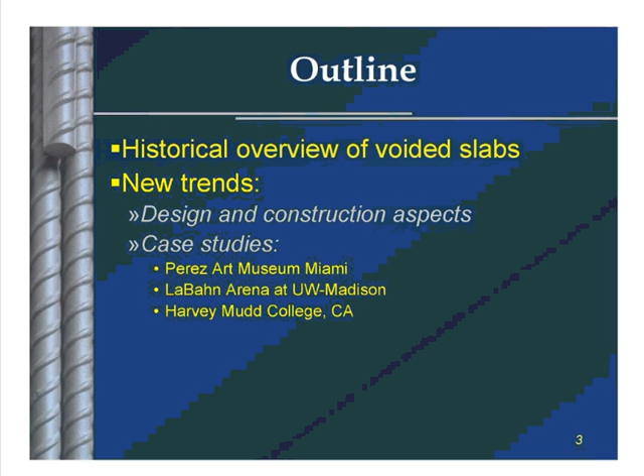The outline for today will start by giving a brief historical overview of voided slabs. I think this is important to put the topic in context. Then we'll talk about the new trends. After all, there's a new mousetrap out there, and that's why we're here having this webinar. So what is it, and more importantly, why is it important to you? We'll talk about design and construction aspects and case studies of 3 projects that are pretty much completed as we speak: the Perez Art Museum in Miami, LaBahn Arena at the University of Wisconsin-Madison, and Harvey Mudd College in California.

The motivation for the seminar is: what are voided slabs, and why use voided slabs? I want to underline constructability aspects because for this seminar I really want to discuss how the system is built. From an engineering standpoint, the system is fairly simple, but it's the constructability I want to make sure comes across as not very difficult to do. More importantly, why should it matter to you? After all, as a concrete contractor, you want to be able to self-perform, and this system, in my opinion, lends itself to that.

On the screen are a couple of pictures of voided slabs, for example a waffle slab or a wide module one-way joist. These systems have been around for a long time, and the goal is very simple: remove the dead load, that extra mass from the slab where it's not needed to carry the load, so we can span further. That's the challenge with cast-in-place concrete, especially when it comes to promoting concrete in the office market arena, where more often than not the knee-jerk reaction from architects and structural engineers is that structural steel is the system that should be used for office buildings. Here we have a system, a wide module waffle slab, where we can span 40, 45 feet. We're going to talk about new trends today that are another tool in the toolbox that can be used to promote concrete in the office market arena.

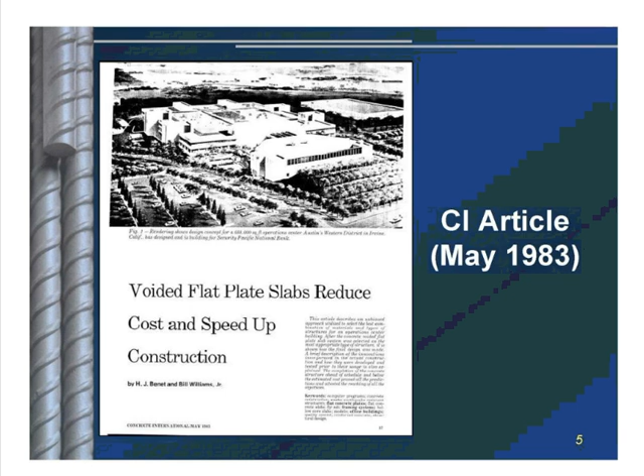From a historical perspective, voided flat slabs, as I found in the literature preparing for this presentation, were discussed in an article published in Concrete International in May 1983 by Bennett and Williams. It discussed the use of these voided flat plate slabs for a project in Irvine. Briefly, it was a low-rise project, about 4 stories, 688,000 square feet, with large unobstructed spans and heavy live loads. The system they looked at was a one-way voided slab, with voids created by sonotube voids, as you see on the screen. Again, the goal is simple: remove concrete where it's not needed to carry the load, so we're able to span further. This is a recurring topic you'll hear me talk about today.

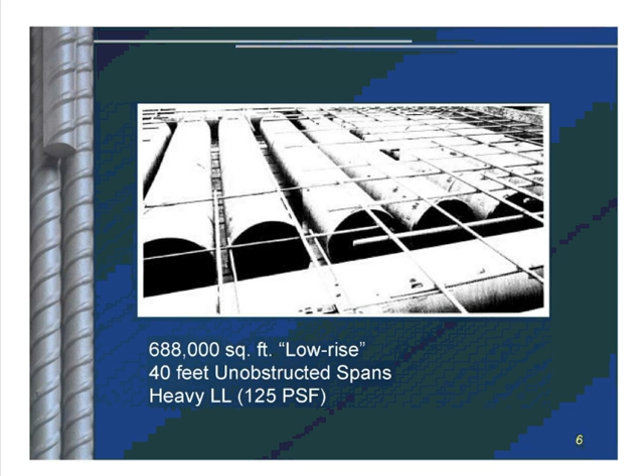They also did a study where they compared the voided flat plate system versus a precast double T as well as structural steel. What you have on the screen, the vertical axis is the cost increment in dollars per square foot, and across the bottom is the area in square feet. So you have times 100, or bay size. For example, a 50 by 50 bay size, that's 2,500 square feet.

As you look at the trend of costs across the bay sizes, you'll see that the voided flat plate is very economical as you almost reach a 2,500 square foot bay size, or 50 by 50. The double T eventually becomes a little less expensive, but for this project the spans were in the 40-foot range, so they decided to go with it. Structural steel was not even close.

And this was out on the West Coast. Obviously, in high seismic risk zones, removing mass is a benefit because it lowers the earthquake force demand on the structure. So, as you can see, this is a system that's very appealing. It was back then, and it remains now, even in high seismic risk zones.

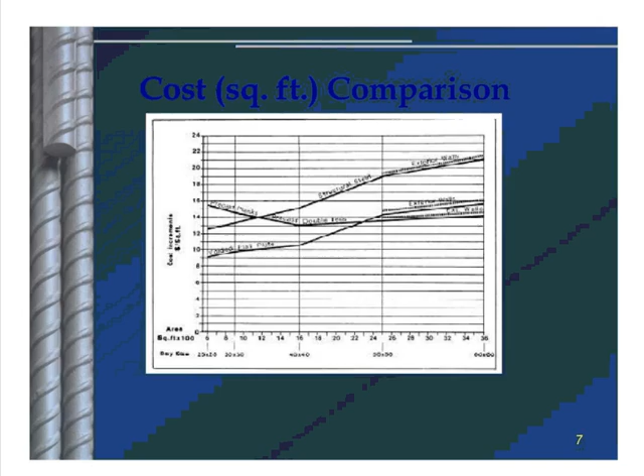Okay, so when the concrete is placed, the void is displaced, which creates buoyancy. Now, there's not enough mass in the reinforcement, the top mat of reinforcement, to hold the voids down. So there's two ways of doing this. We're going to see one way now that I have on the screen, and that's more of a positive way of anchoring the voids using the straps.

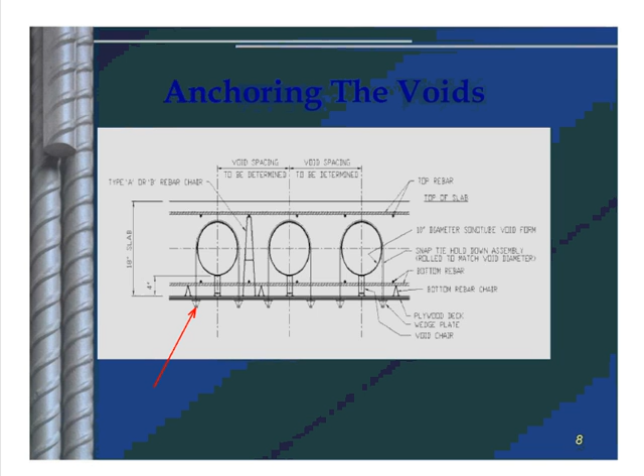Let's see if I can use an arrow here to point to the straps. Okay, so you see here the clips that hold the straps under the formwork. This way, when the concrete is placed, the voids are not displaced. That's one way. There was another way that I'll discuss in a little bit. But this is obviously key in the constructability of the system, because otherwise the system becomes buoyant.

Other traditional systems, I mentioned waffle, wide modules, hollow core - that's another form of a voided slab. Foam voided systems, filigree - many of you may be familiar with this. It's very common in the New Jersey area, and also in the Midwest in some areas.

Essentially, for those of you who are not familiar, filigree is obviously a trade name, so I'll do my best to avoid talking about specific names and try to be general. In this case, this is a composite where you have a precast panel that you'll see here on the bottom. The precast panel is placed on the formwork and acts as a stay-in-place form, directly placed on shoring. Then you have the voids, in this case the styrofoam voids. They're placed, again, with the objective to reduce dead load. And there's reinforcement that goes over it, and the cast-in-place topping.

The system works as a unit when it's done. As you'll see, the surface is left rough to create some composite action, some aggregate interlock. In addition, there are some reinforcement trusses, wire trusses that stick out of the precast that you really can't see from that picture. But the whole system, in any event, works as a composite unit.

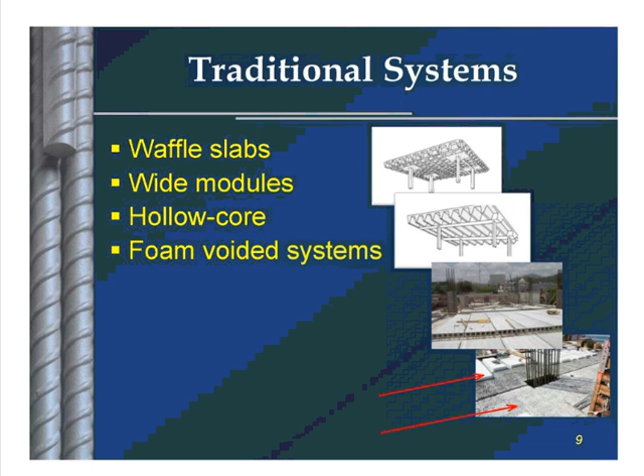So those are the traditional systems that have been around for the better part of 50 years. And even before that, there were other systems that used clay tile. But for the sake of time, I'm just going to leave it at that.

So what is the new trend? The new trend with voided slabs - the goal is to use a flat plate analogy or flat plate application, a system that requires very simple formwork, very economical for short spans in residential type buildings. The goal here is to use that same system with the simplicity of the flat plate formwork and be able to use it for longer spans, as you have in office buildings, 35 to 40-foot spans. And by reducing the mass here, we're able to span further and be competitive in that office market arena.

So what you're looking at on the screen is the shoring here that is supporting the reinforcement, and is also supporting these wire modules, these cages - kind of hard to see, but they're in red - that house the voids. The voids are these blue balls, if you will, on the screen. They have to be placed inside these position cages to hold them in place.

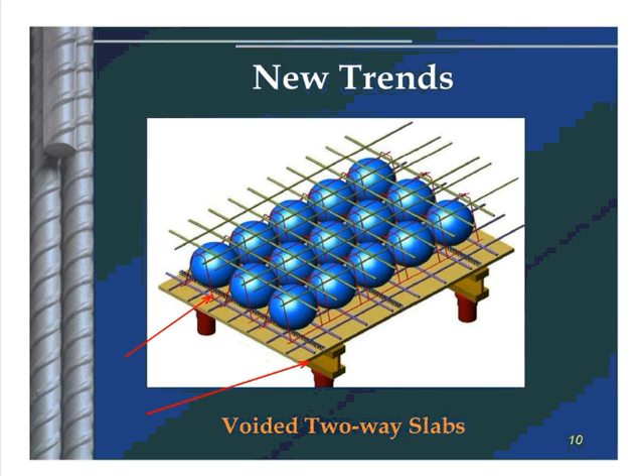So the goal here is, how do you build this? Obviously, we have the same issue with buoyancy. By placing the concrete, we're displacing the void, so we need to be able to hold them down somehow. There's two ways. The one I mentioned before is more of a positive way of anchoring the system, but it's time consuming. If you have a two-way slab, you've got a lot of these voids, and it's tedious and labor intensive to anchor all these systems in place. So what they've come up with—and this system has been used in Europe for the past 15 years—is to place the concrete in two stages.

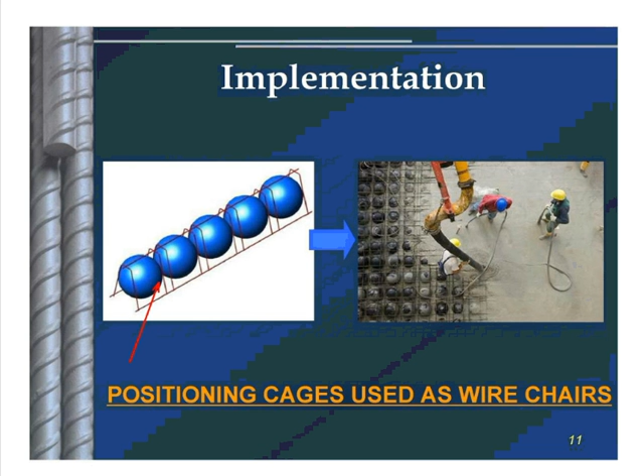The first placement covers about 3 inches, about a third of the slab. We let that set so it's able to hold the cages in place. From that standpoint, it's very similar to the filigree system, where in this case it's cast in place because all the concrete is cast on site, but there were two concrete placements. After 3-4 hours, once the concrete is hardened enough to hold the voids in place, the second concrete placement can take place. After that, the finishes are the same—vibration of the concrete and the finishes—as you would have with a conventional flat plate.

The modules come in two sizes. The low profile modules, 4 to 7 inches thick, are typically used for short spans. But what's really exciting about the system are the standard modules, the 9 to 18 inch deep modules applicable to long spans. This is really the game changer here, folks, where we can compete against structural steel in the office market arena.

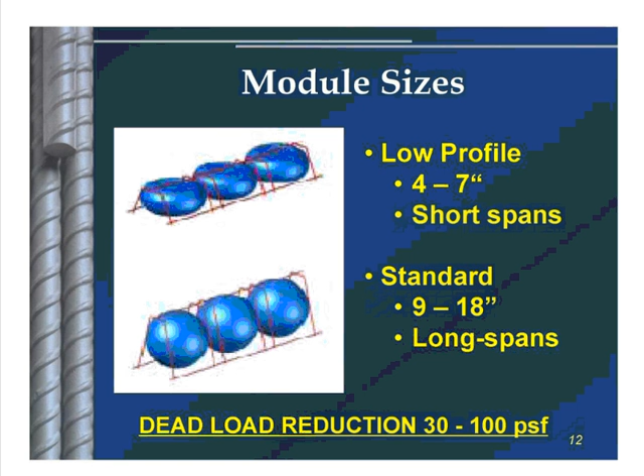We can reduce as much as 30 to 100 pounds per square foot of dead load, a significant reduction that obviously helps in the design. One inch of normal weight concrete is 12.5 pounds per square foot. As we start reducing the slab, the equivalent thickness changes. We still have the overall thickness of the slab—it could even be deeper than a conventional flat plate—but the equivalent thickness is less for a longer span. That's important to keep in mind.

In cross section, I'll try to show the staging of the concrete. At the top, we have the overall cross section before the concrete is placed, with the formwork at the bottom and the voids, as I showed before, on top. The first concrete staging covers about a third of the slab, enough to anchor it and hold it in place. Then the rest of the concrete is finished, and the slab is finished in a conventional manner.

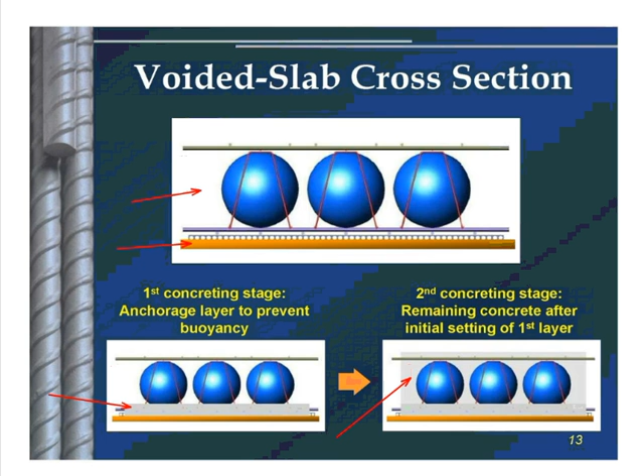So what are some of the benefits? Why are we doing this? Obviously, the goal here is to have large spans without beams. That's the key. Beams are expensive to shore, and in some states where labor is fairly inexpensive, it may be a competitive system, but in the Northeast, Chicago, and out west, labor can be expensive, so eliminating beams is a very cost-effective solution.

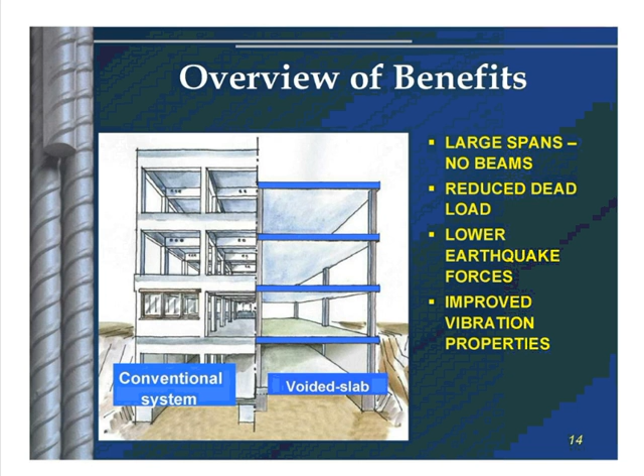Reducing dead load lowers the earthquake force demand on the structure, and this also has an important property relevant when we talk about healthcare facilities, hospitals, where vibrations are a consideration—in addition to other rhythmic type facilities, health gymnasiums, and things like that. Hospitals and healthcare facilities have structures very sensitive to high frequency vibrations. Without getting into the weeds, I can tell you this system is very stiff and very able to dampen vibrations. Some projects now have leveraged the system's ability to be very good with vibrations, so this is yet another important property of this system.

If we compare a voided flat plate, as you see on the top half of the screen, to a traditional structural steel system on the bottom, you'll see that the numbers are hard to see perhaps, but on the cast-in-place concrete, we have a 12-foot floor-to-floor dimension.

The same thing with steel, but the ceiling height in the concrete building is much higher than in the structural steel building. That's because we're able to have a smaller cross-section than with structural steel. With structural steel, for a 40-foot span, you need at least a W27. You throw in 7.5-inch concrete on metal deck, or even more, plus fireproofing, and all of a sudden you have a 3-foot overall structural depth, in addition to whatever plenum space you need for utilities.

This is, again, economical overall in terms of floor-to-floor heights. That has other implications. It allows you to have additional floors given enough building height, or it can reduce the overall height of the structure, with associated savings in reduced cladding costs, lower elevator costs, possibly even lower foundation costs. So all kinds of benefits.

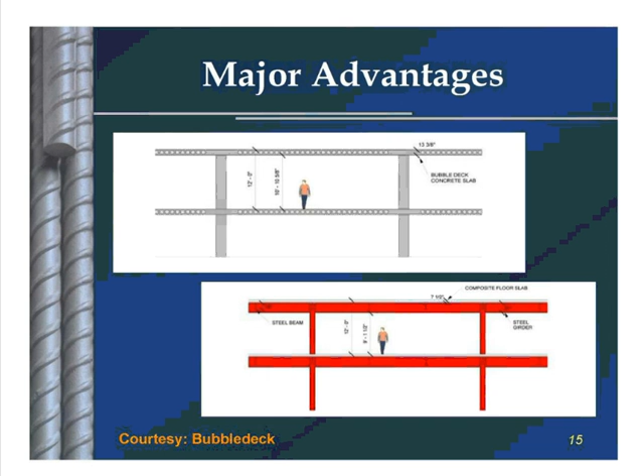Associated with this, the system comes with two options: a cast-in-place, as I've been talking about, but there's also a precast, as you see on the right side of the screen, very similar to the filigree, where the panel comes in from a precast plant with the voids already in place. So all the contractor has to do is set them in place on the shoring and cast the concrete. There is some additional reinforcement that needs to be placed over the joints, but that's the precast option.

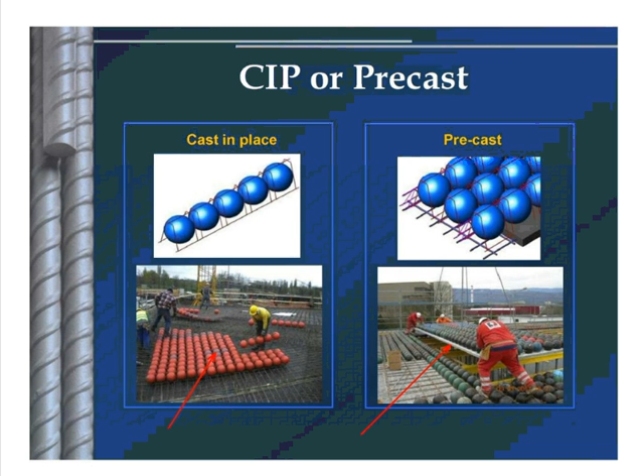As you'll see on the left, the cast-in-place, the voids are placed directly on the reinforcement, and here you'll see the worker placing the voids. You'll also notice that the voids come in different colors, as I'm going to point out. This is because the voids are made of recycled plastic, so nothing is wasted here. From a sustainability standpoint, that has obvious benefits in that we're reusing plastic to make these voids.

Site adaptability is another feature that, even compared to conventional concrete, is a benefit. With this system, you can remove the voids to run fixtures, slab fixtures, as I'm going to show, or run post-tensioning, bonded or unbonded, as I'm showing on the right-hand side. So a lot of adaptability on site to accommodate site conditions and the ability to use the system with post-tensioning. I cannot underscore that benefit enough, both as a bonded and unbonded system. Couple that with reducing dead load, and this really becomes a very effective structural system.

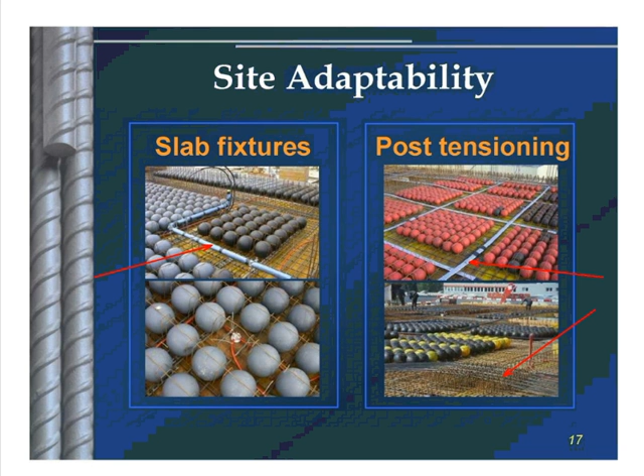Okay, so some of the design principles—I'm not going to spend a lot of time on the engineering. I have a lot of pictures of the 3 projects that I'm going to focus on, but very quickly, so you get a feel for some of the design issues. The voids act like a solid flat plate, but because you have voids, we need to make some modifications. The modifications come in 3 ways.

The dead load—it's very clear we're reducing mass from the system, so we're reducing the dead load. The stiffness—again, because we're creating a void, we're reducing the moment of inertia, so we're reducing the stiffness a little bit. The important one here is the shear reduction. The shear has to be reduced by as much as 50 to 55% where the voids are.

Here's where I need to make it very clear: much like a waffle slab, where the slab is solid around the column and you have the voids out in the middle of the bay—you have the same system here. Around the column, the flat plate, if you will, is solid, because you need enough punching shear capacity around the column. Wherever the capacity of the reduced, voided section exceeds the shear demand—wherever you have more capacity in the concrete with the voids versus the shear demand—then you can put in the voids. If you have questions about this, I'm available at the end of the presentation to go over it in more detail.

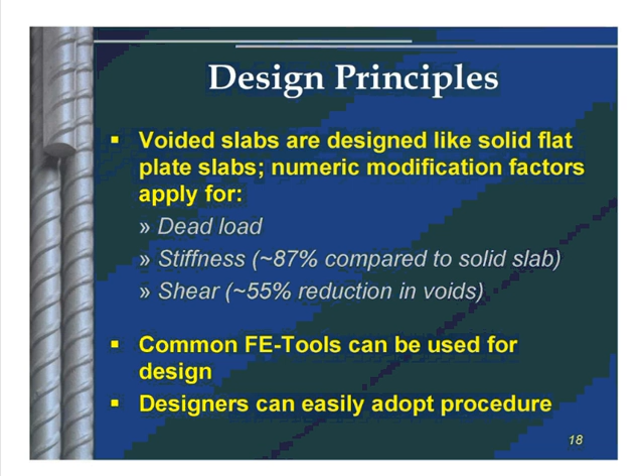You can use common design tools—analysis, finite element analysis, back of the envelope, all kinds of ways to do this—no different than designing a flat plate system, other than making these small modifications.

I mentioned some of the cost savings that make the system really competitive, but here is a full list of additional savings. Obviously, reducing the lateral force requirements, especially in high seismic risk zones, can have benefits. Also, reducing the mass can have cost implications in walls, columns, and foundations—all kinds of advantages. On the right-hand side, construction time gain.

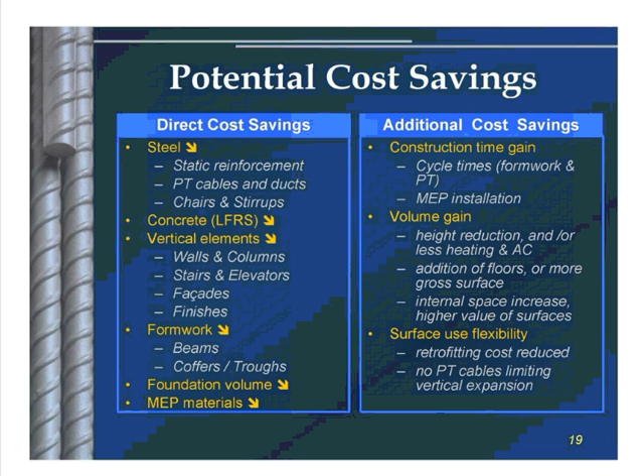You're self-performing, even though there is another system here that may be perceived as using these cages. In the projects I've been involved with, the cages are available to the contractor, and the contractor installs them, so there's no issue from that standpoint. I also mentioned other advantages, like reducing overall building height and the associated energy savings with that, as well as retrofitting advantages.

So let me jump in for the next 35 minutes or so and talk about the 3 projects that are under construction right now. Let me start with the very first cast-in-place option of this system, the voided slab. There have been others that use the precast option, but let's start with this one.

This is the Perez Art Museum in Miami, right on Biscayne Bay. It's being completed as we talk. At least the concrete is topped off, and they're moving on to the finishes and other things. Here's an aerial view of the structure. It's a low-rise structure, about 4 stories, but it's a complicated building.

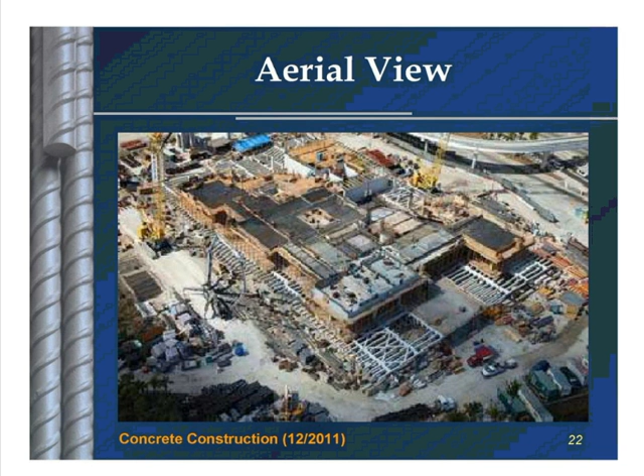From what I understand from the design team, structural engineer, the architect, numerous schemes were looked at and considered, 30 to 40 different types, including structural steel. They eventually settled on the voided flat plate option, which gave them the ability to design the large galleries, as I'll show you in a little bit. Obviously, this being a museum, large galleries were an issue.

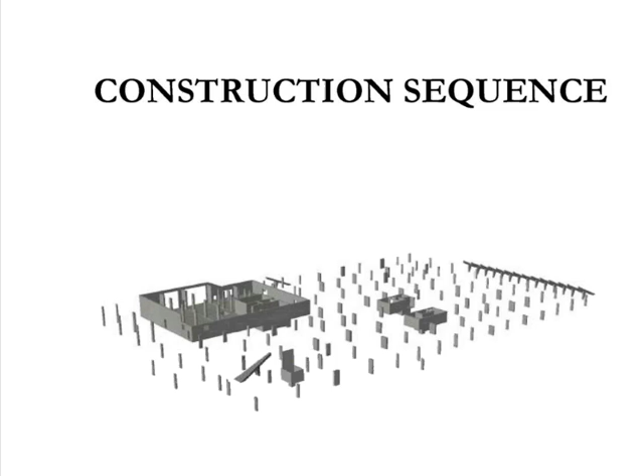So what I'm going to show you for the next few slides is a construction sequence to try to illustrate how the building was constructed and why some of the portions of the structure were designed the way they were, because I think it'll make sense once it's done. So starting at the base of the building with the columns for the first floor, adding the first floor system on top of that.

Now you start seeing something that is becoming apparent, which are these boxes. I'm going to point out to one. So these boxes here house galleries. And the goal here is to build a box that acts as one system with the floor.

So you need to be able to tie the floor with upturned beams, tie them into the walls, and put another box on top. By doing this, you're able to create a very stiff system that really works as a unit when it's built. So this box concept allowed them to have these large openings, as we'll see in a little bit.

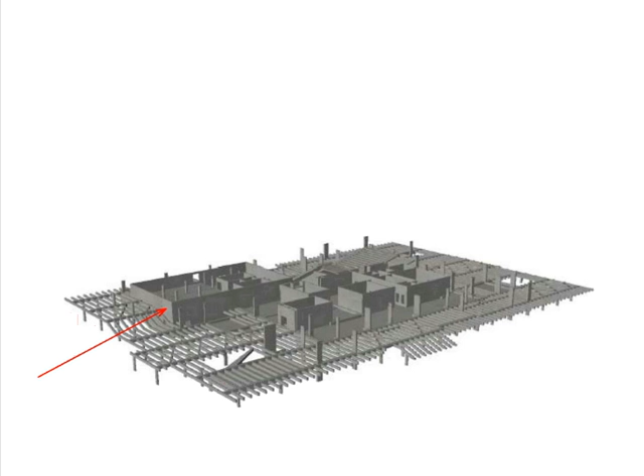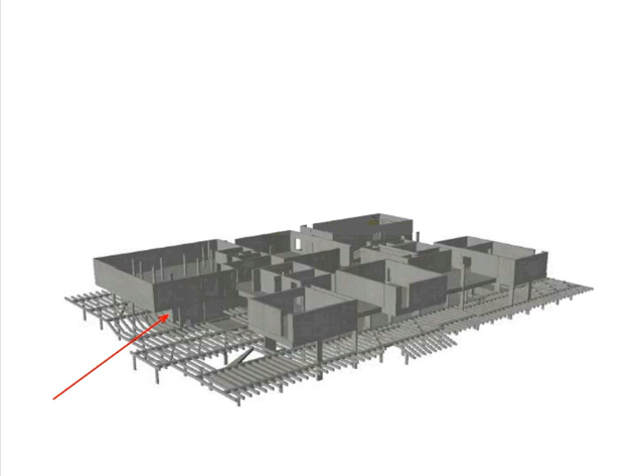Continuing with the erection sequence here, the second level, more boxes on top of that. And you will see, I'm going to try to point out here, very large cantilevers here, and you're able to do this by having one box built on top of the box below. By doing this, you're able to remove some of the exterior supports and have these unobstructed views and these large cantilevers. So you'll see the boxes throughout the structure.

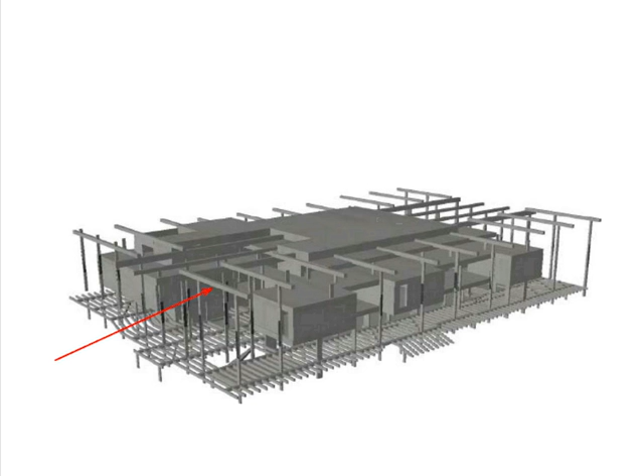The third floor slab and more boxes on top of that. Then we're kind of winding up to the very top where they had these precast beams just for architectural features of the structure. So that's the overall construction sequence very quickly.

And this was the challenge, that's why they went over a lot of systems, to be able to create this illusion of these large spans, some of them as much as 90 feet. By reducing the mass, you were able to put a relatively shallow beam that was able to be placed inside the false floor with a raised floor above.

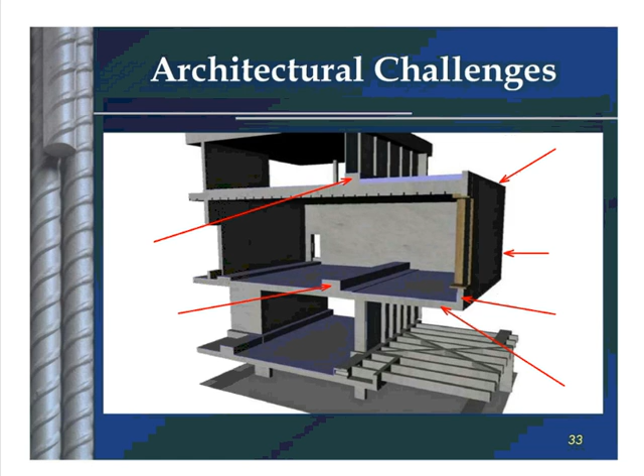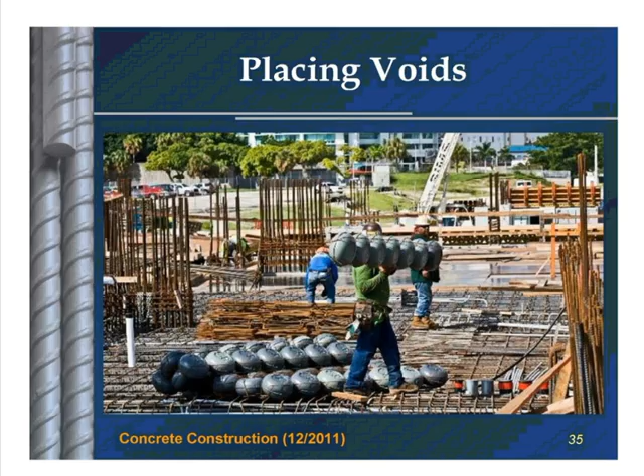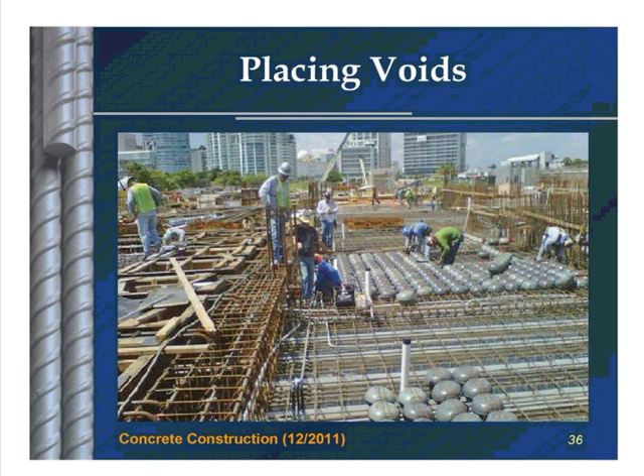Here's a view of the voids being set in place. It's important to make sure they were separated to be able to place the concrete. So I think I have a better picture next that shows this. They used a very sophisticated system to make sure the positioning cages were positioned at equal distance—this piece of wood here with a couple of grooves. But it works, and as you can see, they were able to place these voids in a consistent manner, and that did the trick.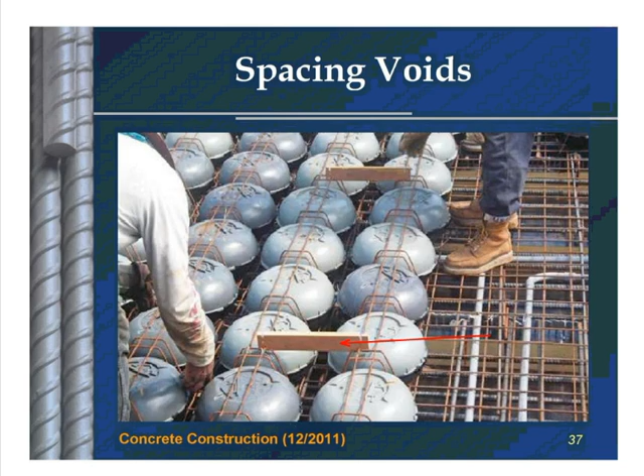And they use different types of voids. You'll see here these are larger spherical voids, and some of these reached, I don't know, 21 to 24 inches in diameter. Depending on the application, they use the squat voids, as I showed before, the normal size, and they pretty much use the full gamut that's available.

Here's a picture of at least one stage of the concrete placement. This one is ready to place the second layer to top off the slab. Similar picture here with the concrete done in the first third.

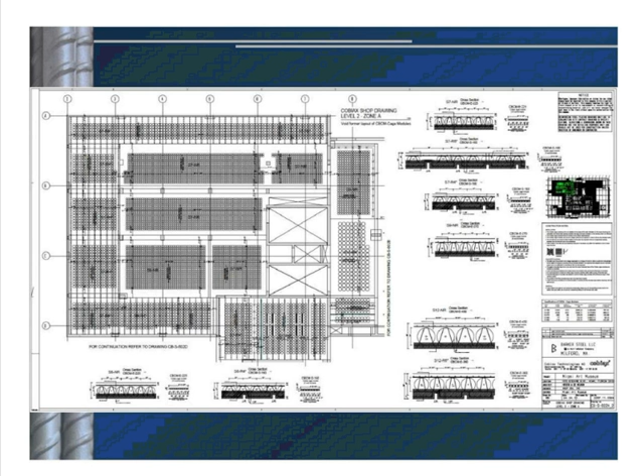This is hard to see with a lot of information, but it's a drawing that shows in plan where the voids are, and some cross sections that show how the voids work together with the slab. You'll see the darker areas here showing how much of the slab has to be placed to anchor the voids.

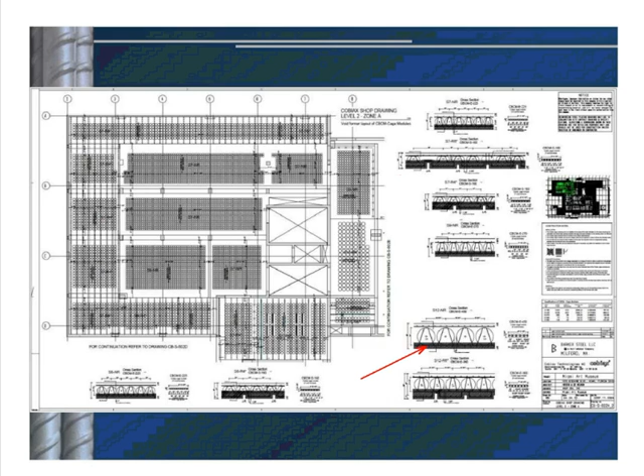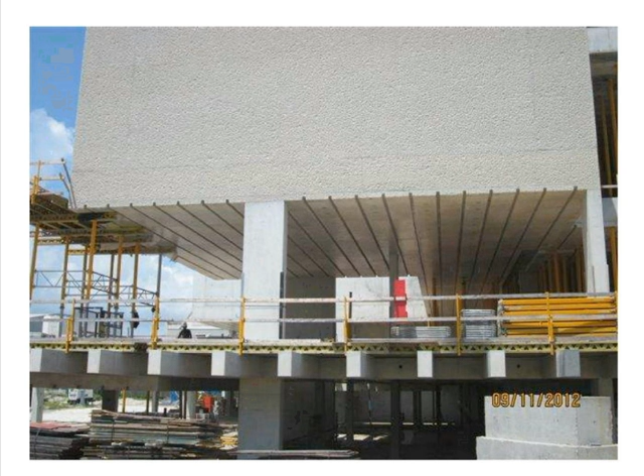A little bit on the project from an outside view—obviously, this being a museum, so finishes were a must. There was a Swiss architect, and as you can see here, the concrete was finished on the outside, but they wanted to have this rough surface. Although the texture looks very nice from a distance, if you look close up, the texture was actually created using a jackhammer—they jackhammered the entire side of the concrete wall to create that surface.

In addition to having these recesses in the slab, as an architectural feature, these were used for different purposes—to house sprinklers, to hide the lights. But as you can imagine, when you have a recess in the slab, something has to give on the other side, and the reinforcement has to be wrapped around the recess, which created a bit of an issue with the placement of the voids. But by reducing the mass and having the flexibility of the voids, they were able to do this very efficiently.

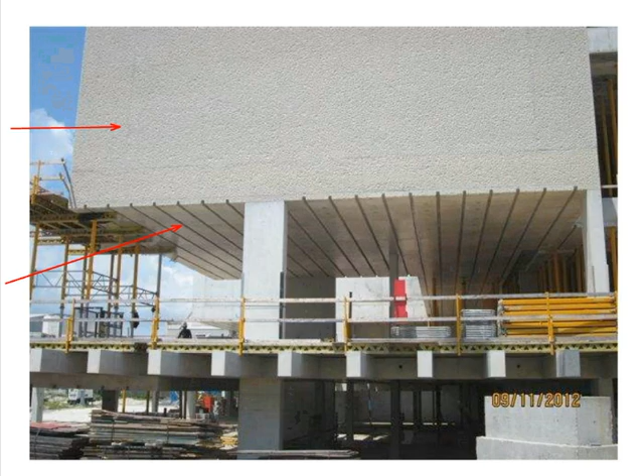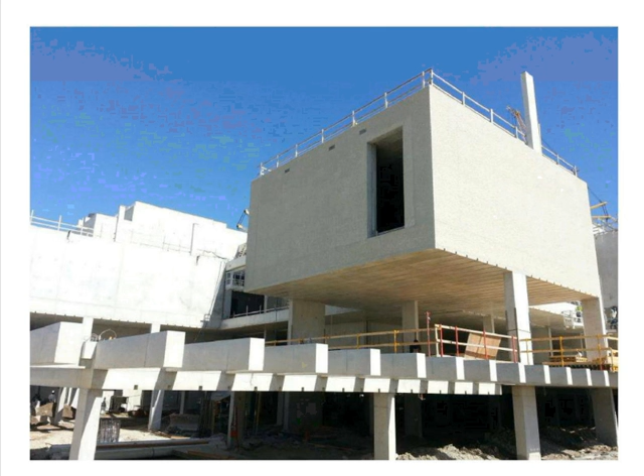Just a few more pictures on this project—shoring in place here. You'll see the large cantilevers, which is a feature of this project. Really interesting. More pictures of the building and the construction.

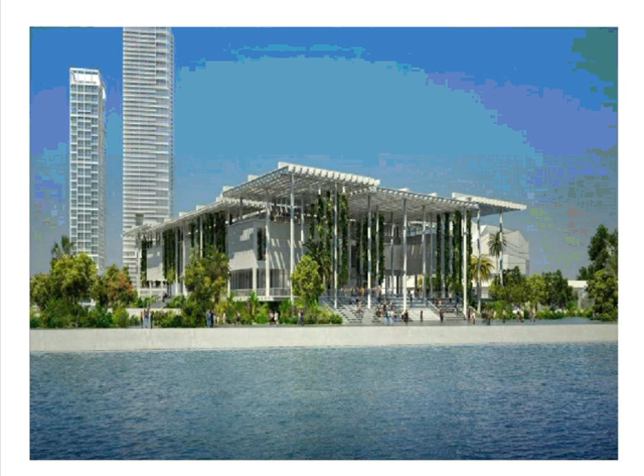And this is a rendering of what the building will look like when it's finished, which is, I believe, sometime in 2014.

Moving on to the next project, the University of Wisconsin at the LaBahn Arena in Madison, Wisconsin. This was the second project I'm aware of where the voided flat plate system was used. The voids were used in this particular section that spans over the locker rooms. The reason they used voids here was to reduce the mass, allowing them to keep the same spans while reducing the overall floor depth—yet another way to build a different mousetrap, if you will.

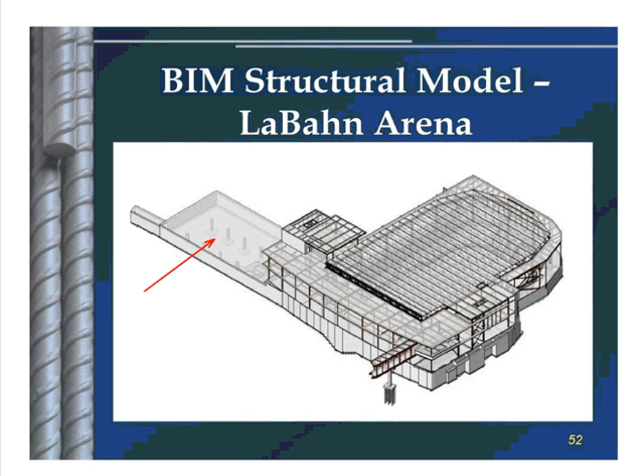Keeping the same span while reducing the dead load gives you a thinner slab profile, which provides additional floor-to-ceiling height in the locker room, which is what they needed. So that's why they used the voids here.

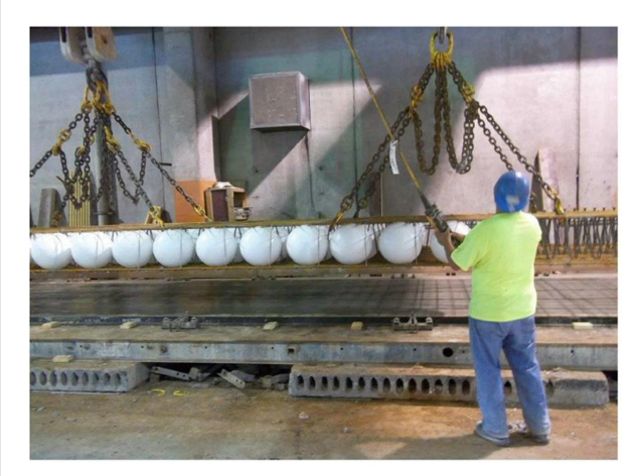These were precast, so the slab and the voids were done at the bottom third of the slab, and the voids were done at a precast facility off-site. You'll see here the voids housed in position cages, very similar to cast-in-place, but done off-site. The voids are being placed, ready to be placed on the slab.

You'll see here the concrete on the bottom, and the voids right there. I know it's hard to see, but the system has stud rails to be placed around the column, to augment punching shear around the column.

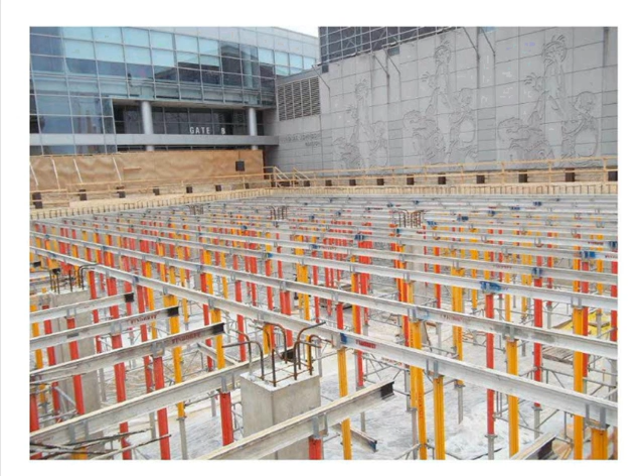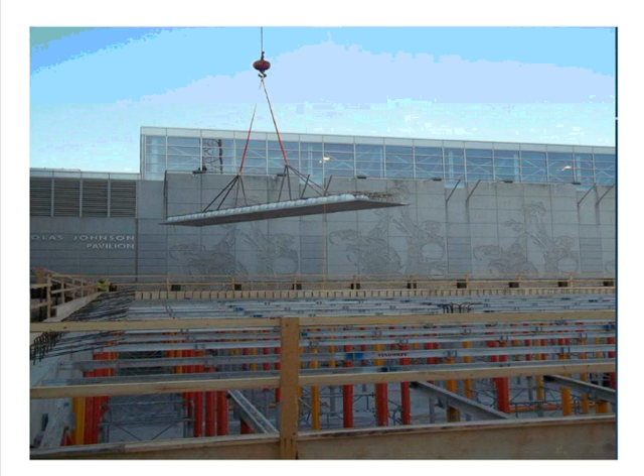You have the shoring at the site ready to receive the panels. The panels are delivered on truck and hoisted to the site, placed in position on the shoring.

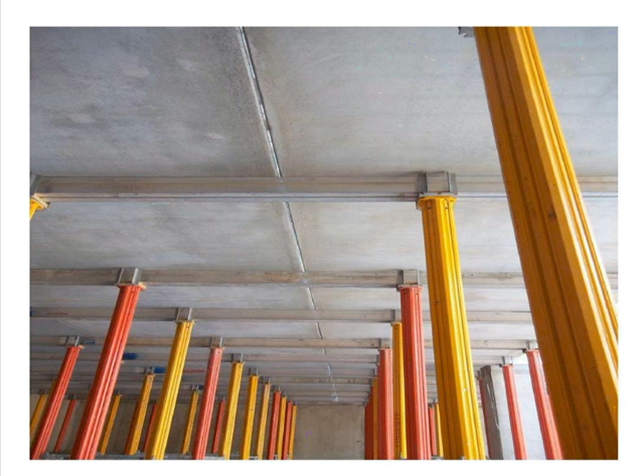You'll see here that about a third of the slab has been placed, and the voids are above, housed in these cages. So when you top off the slab, these units don't move. This is looking from the underside of the slab, using this type of precast panel as a stay-in-place form. There's no need to reshore the slab, so that's an advantage, certainly, from using a precast option.

If you look closely, you'll see a little bit of a grid pattern, which is the shadowing created as the concrete goes around the reinforcement. That's all you're looking at. Here is the joint between the panels, and you see a little bit of daylight.

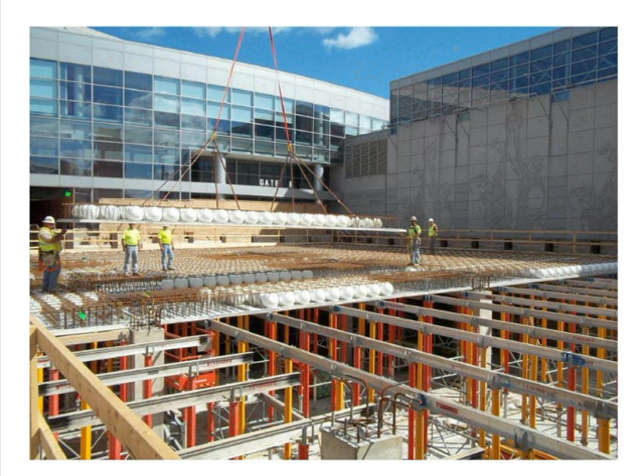More panels being put in place. You'll see the workers standing on these cages, so they're stout enough to hold workers in place.

Something to point out here: around the columns, as I mentioned before, the voids are left out so that you can have a full cross-section of concrete. In addition, you'll see the stud rails we saw in the pictures before, which further augment the punching shear capacity. So you don't need to use a slab drop, as you would without this additional shear reinforcement. There are benefits in doing that because you're saving a little bit in the formwork.

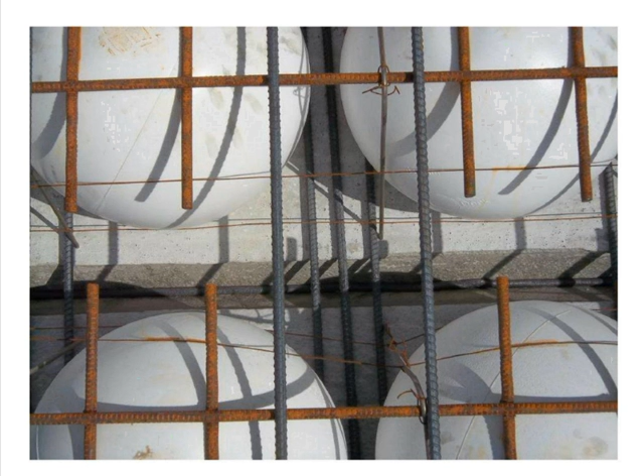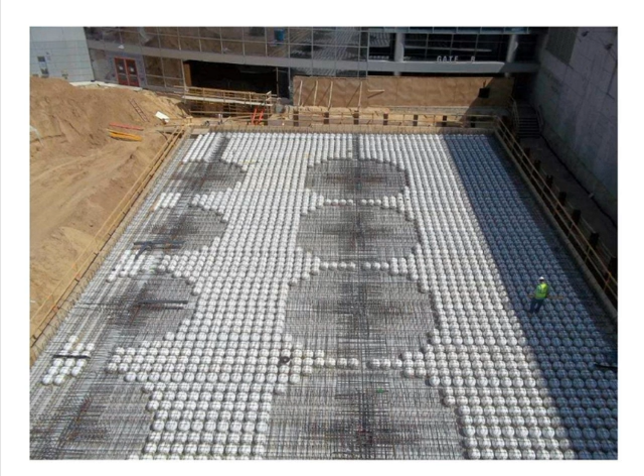Here's a close-up of the panels before the second placing of the concrete. Some reinforcement covering the joint here, additional bottom and top reinforcement over the joint. This is a view before the top concrete placement is done, before the slab is topped off. You see these areas where the concrete is left out around the columns, so you can have additional punching shear capacity.

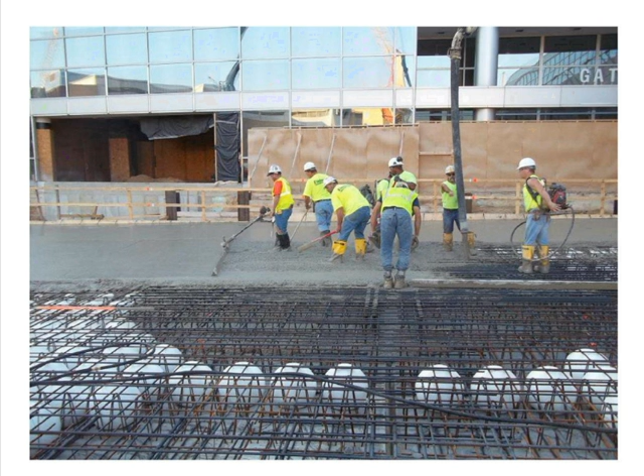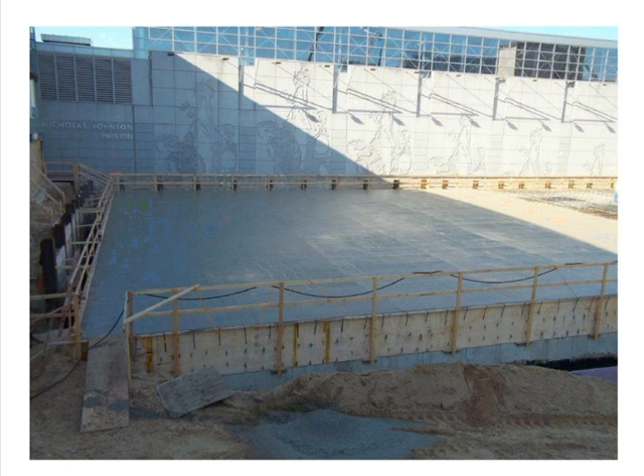You finish the slab in a very similar fashion as you would with a conventional flat plate, so nothing new from that standpoint. Here you see the slab being finished across the top to the bottom, the concrete being pumped. Here's the finished slab, and once you remove the shoring, you can't tell from below or above that there are voids in this slab. It looks the same way.

So why were voided slabs used for this project? Approximate numbers, without getting too involved in specific dollar amounts, but approximately savings of $2 a square foot, about 174 cubic yards of concrete. They saved about 3 days off the schedule, saving on shoring by using a stay-in-place form system, and saved overall structural depth.

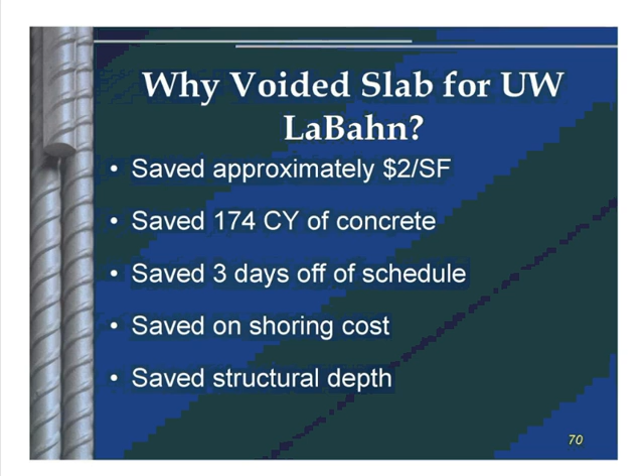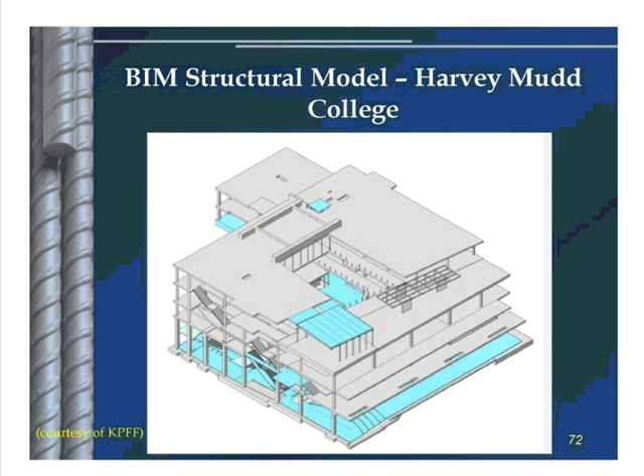The next project is the Harvey Mudd College Teaching and Learning Building in Claremont, California, obviously in a high seismic risk zone. Here is a BIM model showing the project: a 4-story educational facility with about 80,000 square feet of voided slab.

Not a tremendous amount of voided slab, but as we are taking small steps, I like to make sure we do the small buildings properly before venturing into large, 400,000 or 500,000, a million square feet of building space. So far, so good. Different void sections were used, ranging from 9 to 20 inches, with overall slab thicknesses and domes inside the voids for the particular slab thickness, located in a high seismic risk zone.

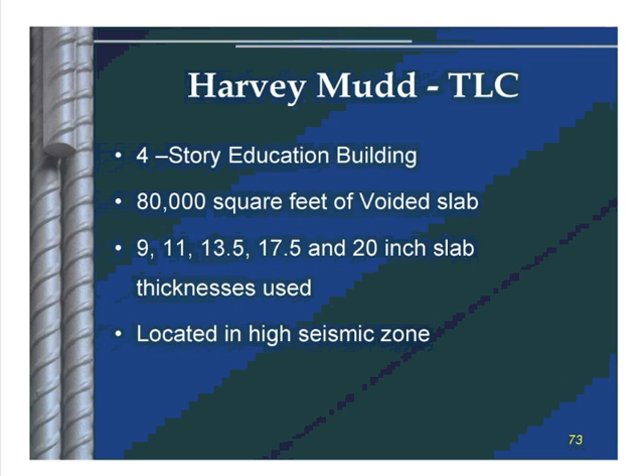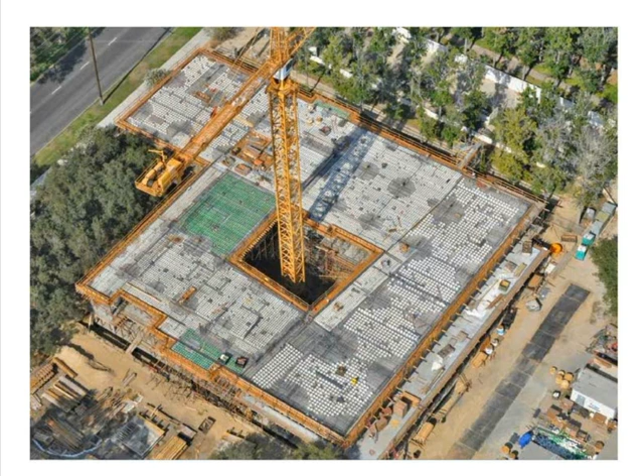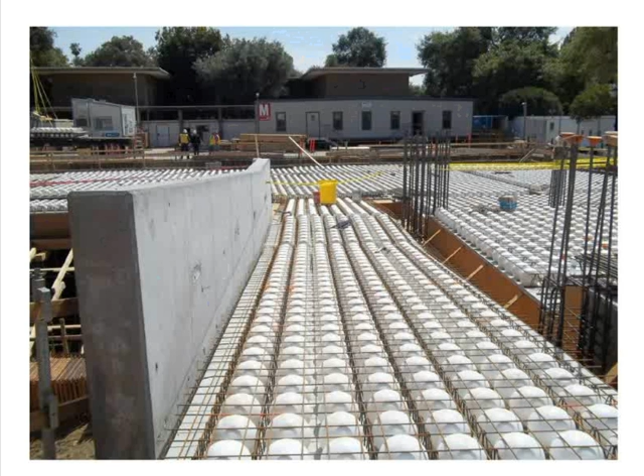Here's the same project, and they also used it for ramps around the parking garage. Here's the panel being put in place.

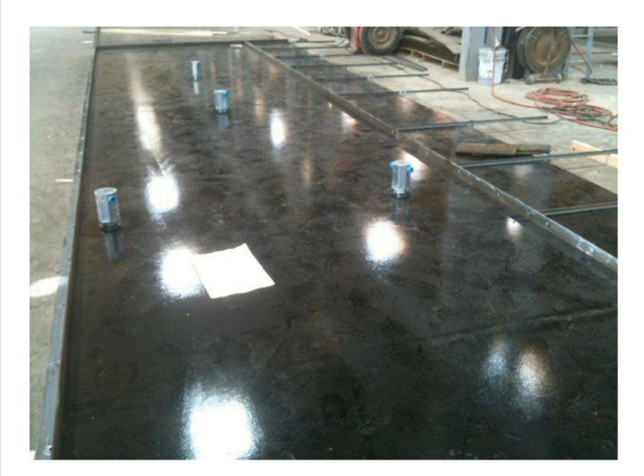You'll notice here there are some areas that are shaded differently on the picture, and these are knockoff areas for utilities, so that they can run utilities through these areas. So the section of the slab here can be knocked off for utility purposes.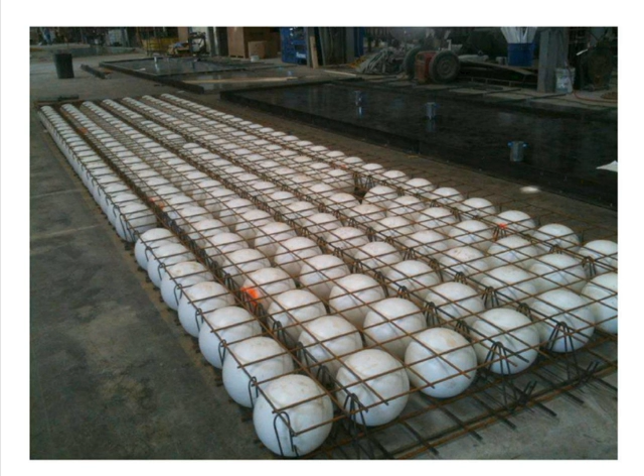Going back to the plant, you have the formwork for the slab before the slab is cast, with the areas where the openings are going to be located. Here is a close-up of the system before the concrete goes, and you'll see the conduit running between the voids. So, as you can see, a flexible system.

Why was the voided slab again used for this? High visible exposed concrete ceilings, a lot of MEP coordination with this project. Reducing mass from a seismic standpoint was a driving force here, this being in California. Long-term deflection considerations were an issue as well. It saved about 750 cubic yards of concrete.

I want to make a point here that when I promote this system, and I've been promoting this system for the past 5 years, I go after a market segment where reinforced concrete is not traditionally the system that's commonly used. I'm referring to the office building market. As I mentioned at the start of the presentation, the knee-jerk reaction is to use structural steel. So what we're doing here is going into a market segment where concrete is not commonly used. What I'm trying to say is I'm not trying to cannibalize what we already have, which are the residential buildings, the short span buildings.

I don't believe that this system is economical for short spans, in my opinion, and the projects that have been done confirm that you need to be at least in the 35-foot span range in order for the system to be economical. You certainly can do it in shorter spans, but an 8-inch flat plate is a very common, very economical system that is used for residential structures all over the country.

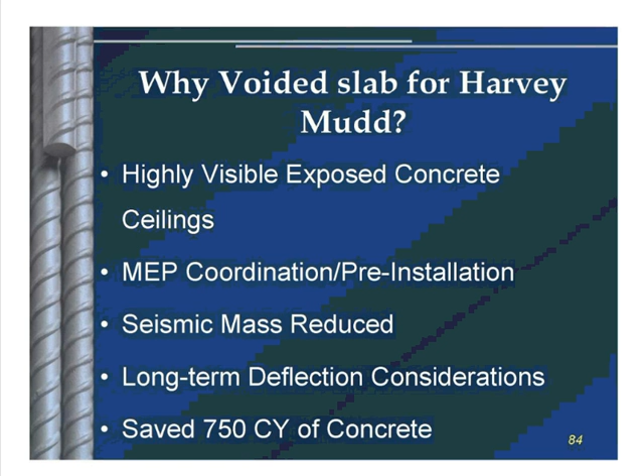I'll wrap up the presentation with the Watertown Regional Medical Center in Watertown, Wisconsin. This is the fourth project where, I guess I stand corrected from the original outline, I apologize, there's one more project here. This was obviously a regional medical facility, 2-story, 30,000 square feet, so not a very large structure.

Existing concrete systems that were looked at: waffle slabs, concrete pan joist, precast concrete and steel beams. I'm not saying, folks, that voided slabs are the answer to everything, by no means. What I'd like you to think of with these voids is yet another solution that we can put in front of the owner, the developer, the architect, the structural engineer, the decision makers, if you will. There's a game changer here that should be looked at initially, not as an afterthought, because it's always difficult to try to convert a design that has been done in structural steel to concrete. There's obviously a certain amount of inertia from the structural engineer and architect in trying to do that, as well as the additional design costs.

The goal here, and some of the contractors that I've spoken to from the Midwest, the East Coast, and even out on the West Coast, we need to get in early on in the design process so that we can be effective in making these changes, in converting these projects from structural steel to reinforced concrete.

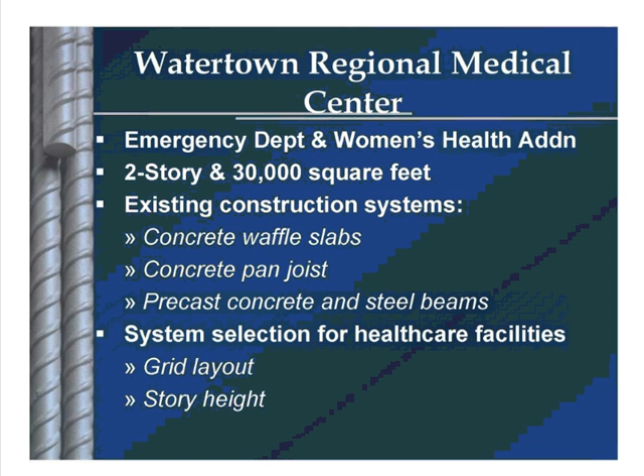So anyway, getting back on track with this, certainly the factors, the grid layout, the story height were issues that had to be considered. But again, the voided slabs came out on top here, and as you'll see, you're seeing the same type of pictures that I've shown you before.

What I'm trying to do here is show you that if you're going to do this, you're not going to be a pioneer. You know what happens to pioneers, right? They get arrows in the back. So somebody else has done this in the U.S., so there's a little bit of a track record that we can point to, and that's the reason I'm showing you all these projects. Here's a close-up at a joint between panels.

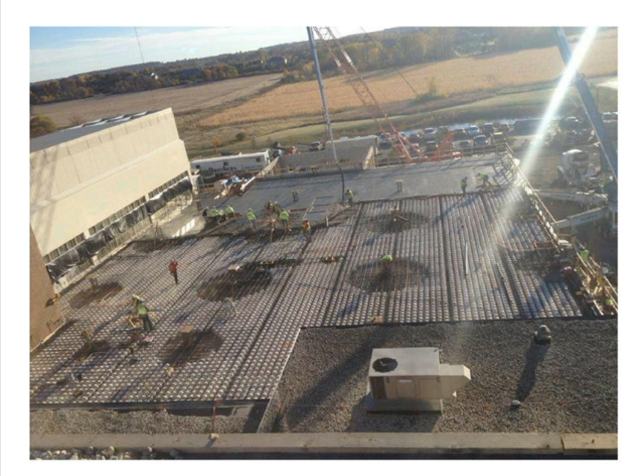The concrete here is being placed on the top half of the screen. Again, the voids in the middle, around the column, are being left out.

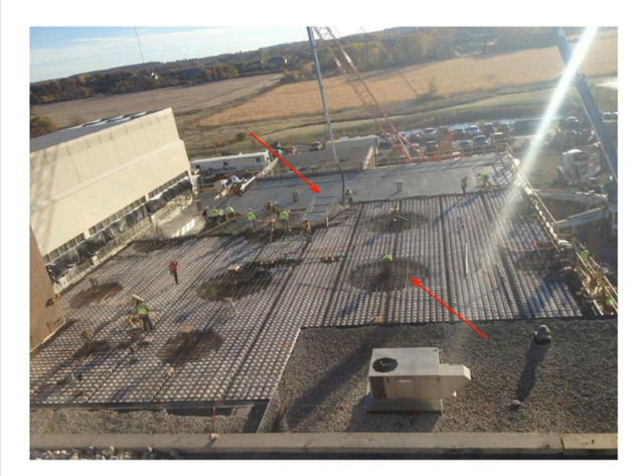This was an addition that had to match the existing facility shown here. From a floor-to-floor height standpoint, they absolutely had to match the existing finished floor elevation. The voids allow them to do that by reducing the slab and having more control over slab thickness.

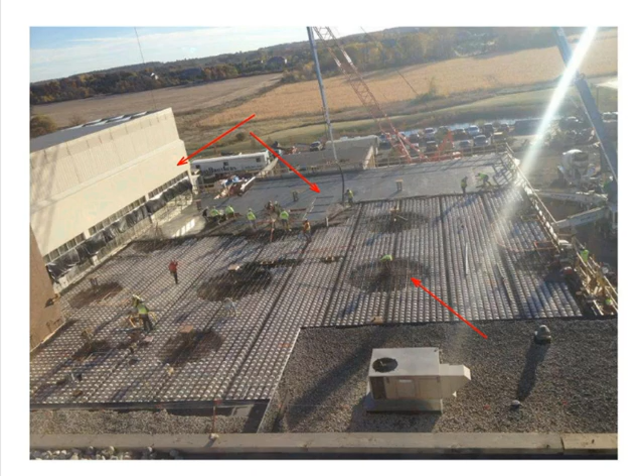Why voided slab for the Watertown Regional Medical Center? A flexible and larger column grid, a thin structural system that led to higher headroom for mechanical, electrical, plumbing, as well as medical systems, material savings, and increased construction speed by minimizing on-site labor.

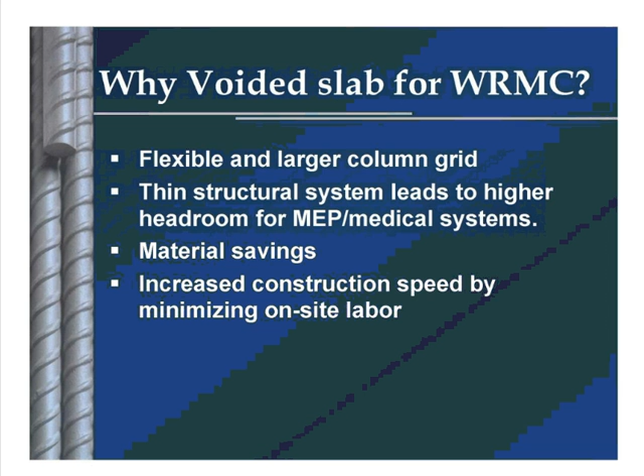In summary, I'd just like to leave you with a thought. Certainly more information is available at our website, crsi.org. Just some concluding thoughts here: voided slabs are a time-tested concept.

From the turn of the 20th century to now, there have been many systems used, ranging from the old clay tile systems to what I just showed you. Different mousetraps, folks, to try to solve one problem: reduce the mass so you can span longer. That's the key. The technological advancements have improved efficiency.

It's certainly a more sustainable type of construction by reusing plastic, and economical for commercial type structures. There are some design-build advantages where you have more control, you self-perform, etc.

Several new projects are in addition to the ones we've discussed. I am aware of about 3 new projects in the works in New York City, and a very large project in Iowa.

Very exciting, folks, the system is here. I have been promoting and writing about this for the past 5 years, and I never get tired of talking about voided slabs, especially with this new improvement to a very old technology.

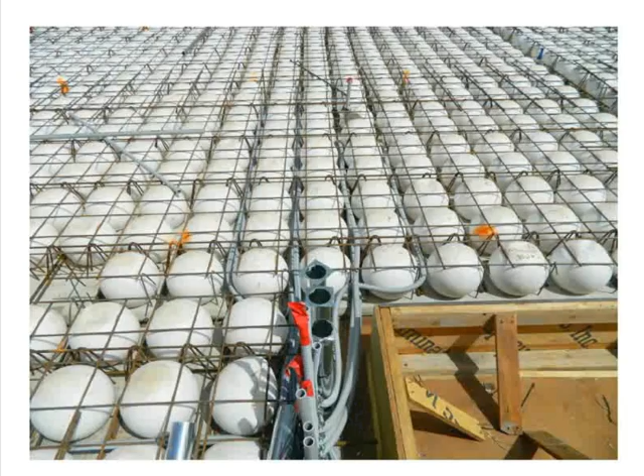No, absolutely, obviously that's tremendous flexibility with a wide module. Let me see if I can go back in. I want to point out that you have similar flexibility with this system. I'm trying to show a close-up where you can see this. Because you cannot coordinate everything until you get to the job site and things come up and you need to make changes, you certainly have that flexibility with this to be able to do that.

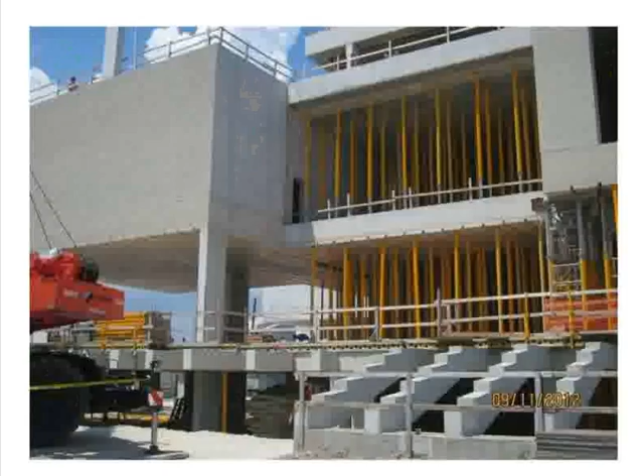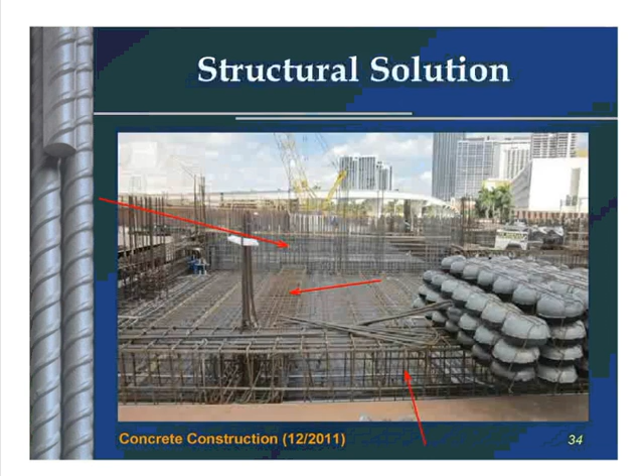Again, I'm trying to find a picture that shows some of those openings. Maybe if I go back to this one... sorry if I'm moving this a little too fast on your screen. Let's see. Well, okay, maybe if I go back to this one here.

There's an opening here, or at least there was a void left out for a particular reason. But those things can be accommodated on site. Granted, you have a thicker slab to cut through, so that's a consideration. With a wide module, you have a 4.5 inch slab thickness between the beams, which makes it more economical.

With the wide module, those areas where you can make penetrations afterwards are at very regular spacings. There's no guessing.

Do you know what the average material cost of the voids and the cages are?

I'm not trying to evade your question, but I'm not going to get into costs, for two reasons. One, I really shouldn't, representing CRSI, that's not something I should do. Two, I can refer you to people that can inform you on that. And three, we've only had 4 projects in the works, in different parts of the country - Florida, Midwest, West Coast - so I don't think we have enough of a track record yet. But I can point you to 2 companies that deal with this, if you're interested, and they can give you more information.